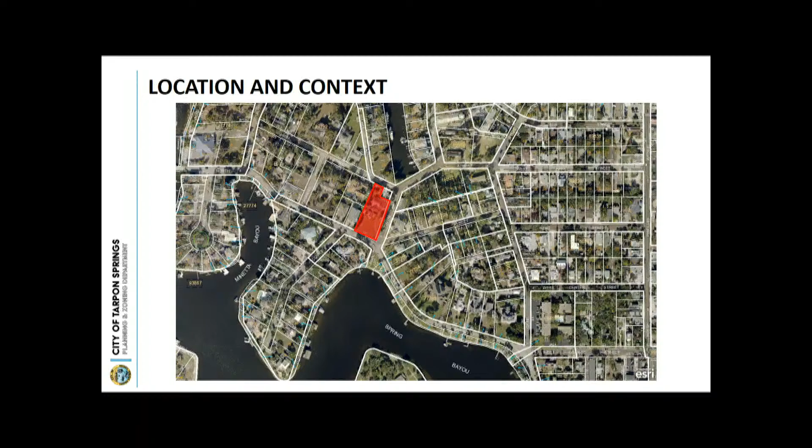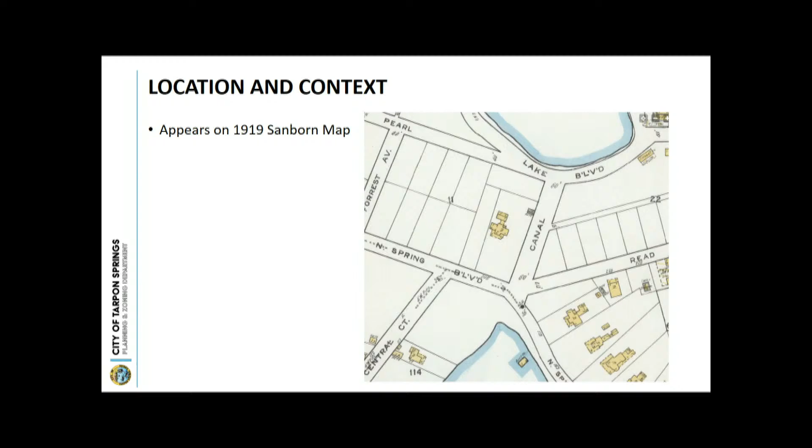This application is requesting approval to remove a portion of the existing driveway and install a new circular driveway, parking area, and walkway to North Spring Boulevard. An existing gate would be relocated to shield the parking area and air conditioning unit.

The subject property is a contributing structure in the neoclassical revival style. This is the picture from the Florida Master Site file. It shows the neoclassical elements, including the oversized two-story columns, the full height entry porch, and the symmetrical front entrance and fenestration.

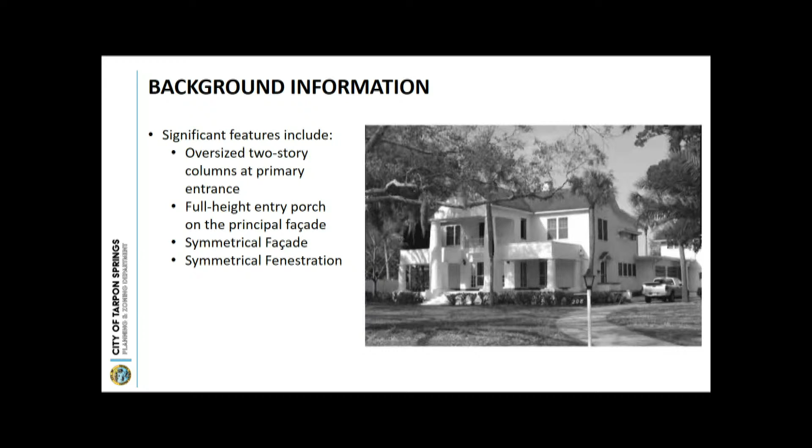So here's some background information about the property. The existing circular driveway doesn't meet our current code. However, it was constructed prior to the adoption of our current code, so it is considered legally non-conforming.

This is because the width of the two driveways—the circular driveway has a 9-foot driveway close to the intersection of Canal and Spring, and another driveway entrance near the existing garage structure. The existing width is approximately 35 feet at the garage and 9 feet closer to Spring Boulevard. So we would not permit this to be built today. However, as shown at the bottom left, this is a 1980 aerial, and it was constructed then, so it's legally non-conforming.

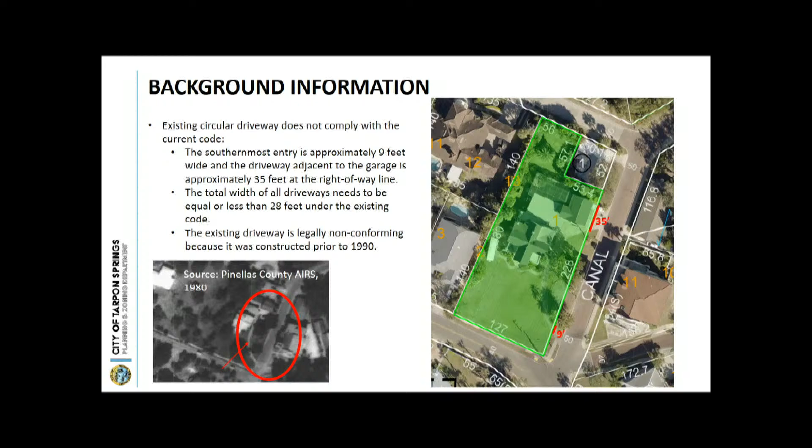This shows a conceptual site plan for it. That green area at the bottom right is the existing driveway entrance that would be removed. Just north of that, in the yellow with dots, is the existing driveway that would be removed and replaced with brick pavers. The remainder is all new, constructed with those brick pavers.

The applicant proposes 12 feet for the width of the driveway portion and 7 feet for the walkway portion leading to Spring Boulevard.

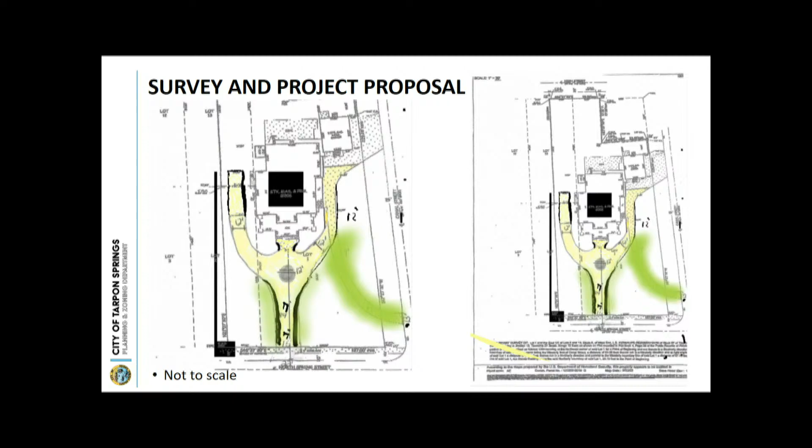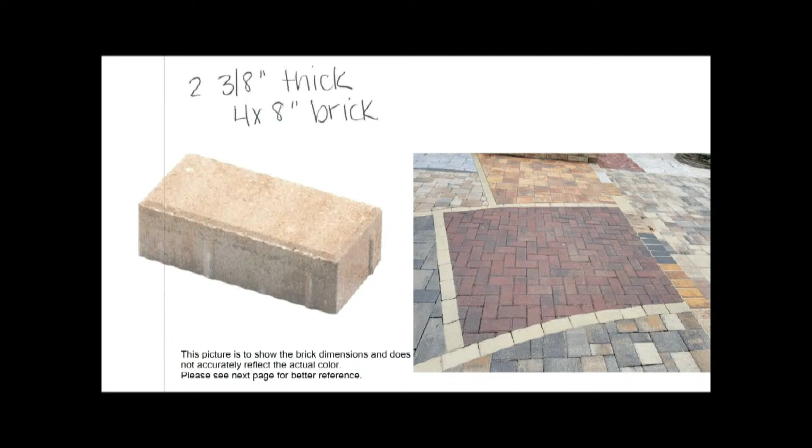However, that is why the applicant has proposed putting that new driveway on the west side of the house and moving the fence so that it would not be used primarily for parking.

The landscaping historically seems to have been of a kind of great lawn style with a lot of open grass, palm trees, and oak trees. However, that has changed a little bit over time—some trees have been removed, some new trees put in. And while the pavers would be a change to the historic landscaping, it wouldn't be inconsistent with the character of the neighborhood, as I've shown.

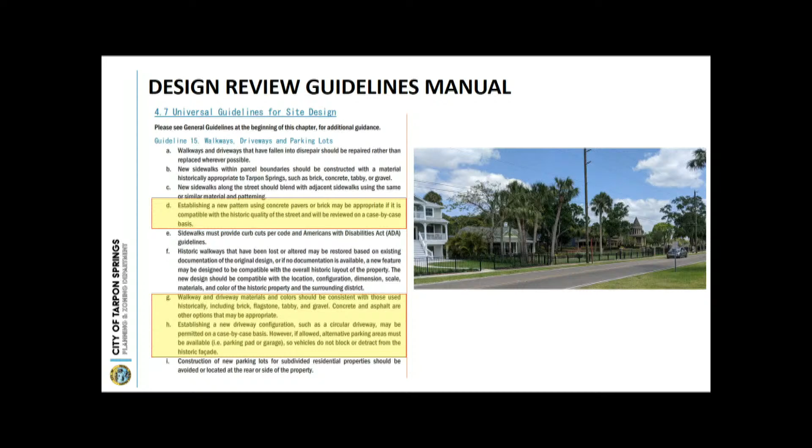And again, from the Design Review Guidelines Manual, considerations about altering historic layouts, textures, and materials—it's considered a good alternative to establish a new circulation pattern that's compatible and complementary to the historic design. I think the symmetry of the circular driveway and the two arms coming out would be compatible with the symmetry of the historic style of the home.

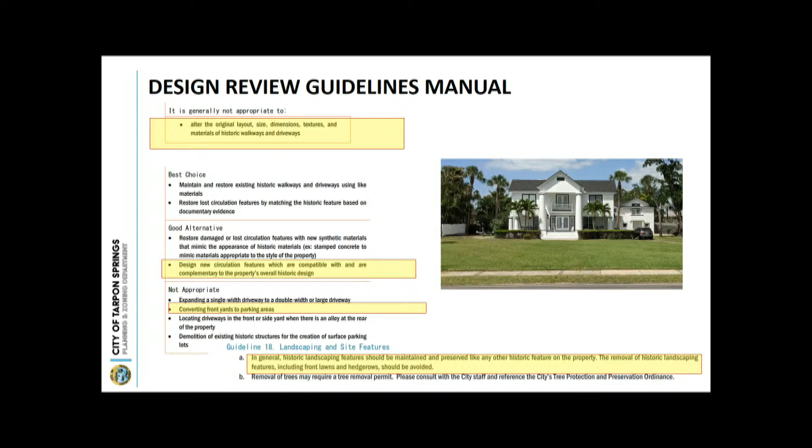So finally, I would say that the proposed project meets the Secretary's standards because the additions and exterior alterations don't destroy any historic materials. The new work is clearly different than the old work, and these additions could be removed without affecting the essential form and integrity of the historic property.

Furthermore, the project would be constructed in compliance with the Land Development Code, the Florida Building Code, and it balances the goals, objectives, and policies of the comprehensive plan.

Additionally, because the existing driveway is illegally non-conforming, this would bring this property closer into compliance with the code. So based on that, staff is recommending approval of application 2231 as presented for a certificate of approval with the condition that the circular driveway is not used as a parking area and would not obstruct the historic facade of the property, and that the certificate of approval would expire in 3 years if a building permit has not been issued.

And with that, I'm open to any questions. No? Okay, I just have a quick one. When on one of the other slides, you mentioned the landscaping. Is there any other landscaping that's required with a project like this? No. Okay, thanks. Okay, thank you.

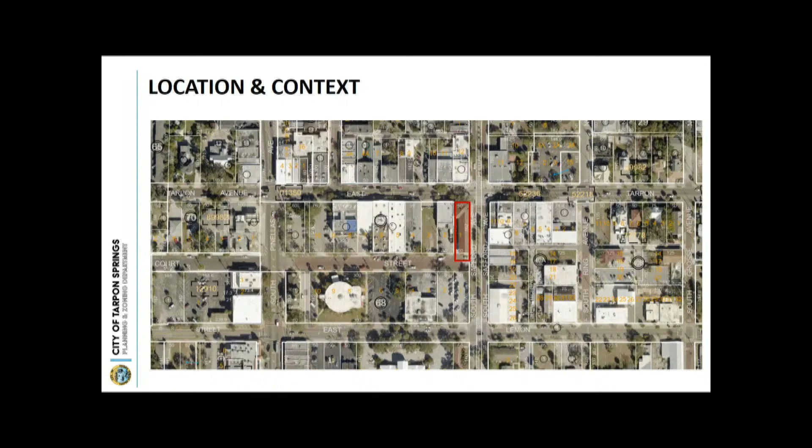Here is the location of the subject property on East Tarpon and Safford Avenue, located within the National Register District as well as the local historic district.

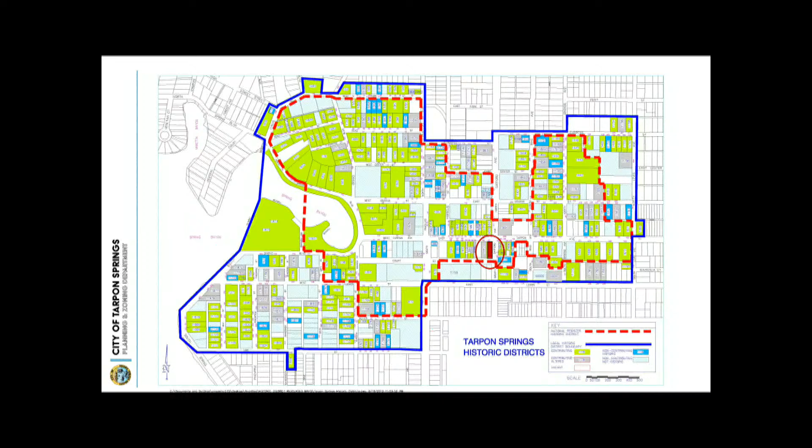The request is for a certificate of approval for the accessory structure, essentially a glass display garage for the jitney vehicle in the public right-of-way south of the historic depot. The architectural style of the depot is masonry vernacular. It is on the National Register of Historic Places in its own right, in addition to being a contributing structure to the districts.

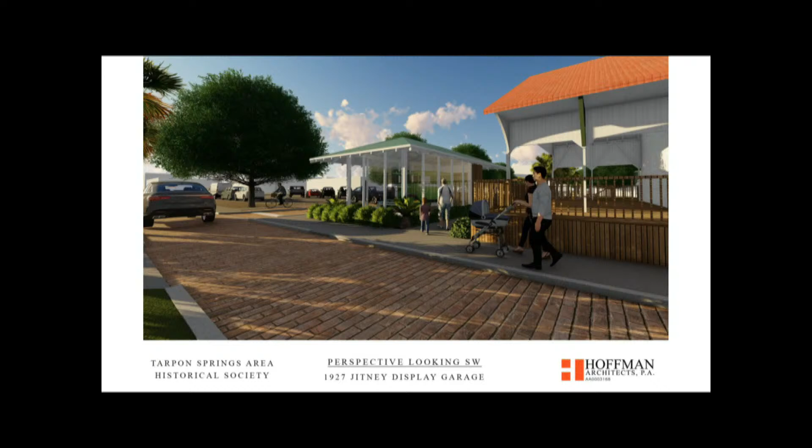So we have our standards for review. This structure is consistent with the surrounding area. It's got some elements of old Florida style, the standing seam metal roof, for instance. But it's simple, consistent with other accessory structures in the area. It fits into the neighborhood context, but it's not pretending to be a historic building. It is still clearly quite new.

The size and massing, the depot is rather large, and this structure would be much smaller, so it would be subordinate to the primary structure. I think that adheres with the Secretary's guidelines. It would be constructed in conformance with the Land Development Code, the Florida Building Code, and balances the objectives, goals, and policies of the comprehensive plan.

There are some guidelines for review that are relevant. The design guidelines review manual states that a new garage should try, not necessarily to replicate, but be consistent with the style of the primary building, which I think it does.

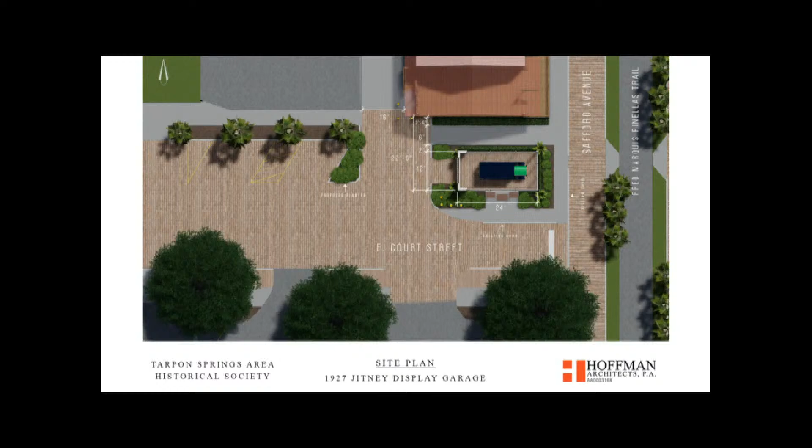Material-wise, we want to use brick and keep that consistent with the brick street the way it is now.

As you can see, the building is a fairly open building. That's the whole point of it, to be able to display the jitney 24/7, so anybody out there on the sidewalk can come by and see it. Currently it's housed in the city warehouse over here, and no one ever gets to see it. That'll be a big change.

We're going to air condition it and dehumidify it, so we can keep the car in good shape and keep the mildew off of it. We'll also have access on the backside of the building, where there are two old doors that hinge, so we can roll the car out and put it in parades or wash it or whatever we need to do with it.

We'll be lighting it. A number of people were involved in the fundraising of this several years ago, it's been a huge community effort. We have a bronze plaque, and we want to set that along with the history of the jitney there, so it's very informative to somebody walking up to it.

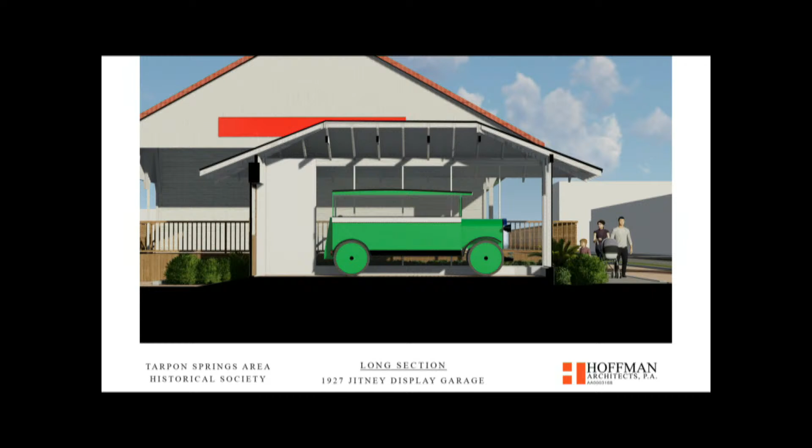There's one thing I don't think made it into this, the sign, the Tarpon Springs sign that's here. Keep going. Okay yes, thank you, it made it into the program, it made it to the show.

The staff pointed out, and that was a good call, that the sign is located down lower. So part of this is that we'll probably want to raise the sign on the building, the Tarpon Springs sign, so that if you're coming down the trail you're able to visually see it, it's not hidden behind the roof when you're looking at a distance.

That is pretty much the explanation of the building. I can certainly answer questions.

Color-wise, we have a little color panel. But, did I drop something? I thought I did, but maybe not.

The colors are very similar to what you're seeing there, well, not so much in this one, but the other one with the light green roof. Then the white trim, and the base color of the building, a kind of gray, a warm gray. Even though we have the white trim around, we might have the storefront that the glass is inset into done in a dark bronze, so the glass seems more expansive. The color is probably very similar to what you all approved for the Vincent Funeral Home, that kind of character. So it's a little bit of a Florida kind of building, with light colors.

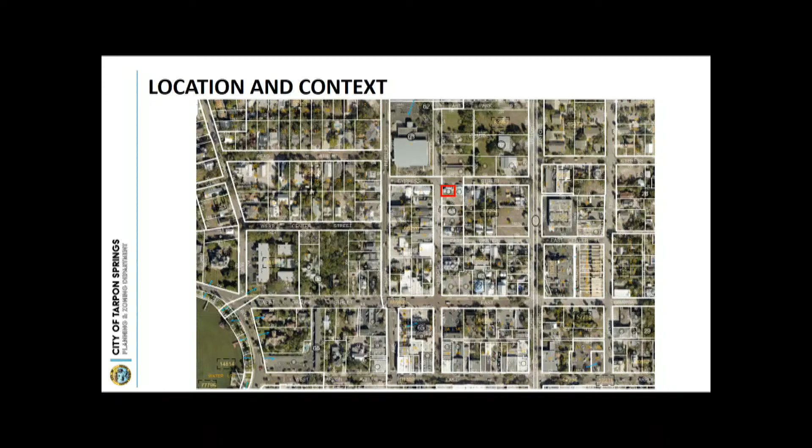So this is application 2249. The applicant is Patricia Hill, and it's for 230 Hibiscus Street. Here's the location of the subject property at the southeast corner of Hibiscus and Cypress Streets, just outside of the National District and just inside of the local historic district.

The applicant is seeking a certificate of approval for the installation of a 10 by 12 wooden shed at the rear of the property. It includes a high wind resistant shingled roof and hurricane straps. While it's considered a temporary structure, it's going to be rather sturdy.

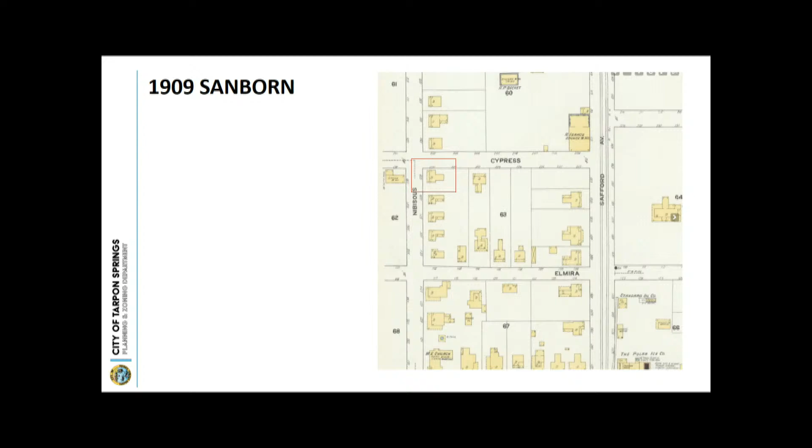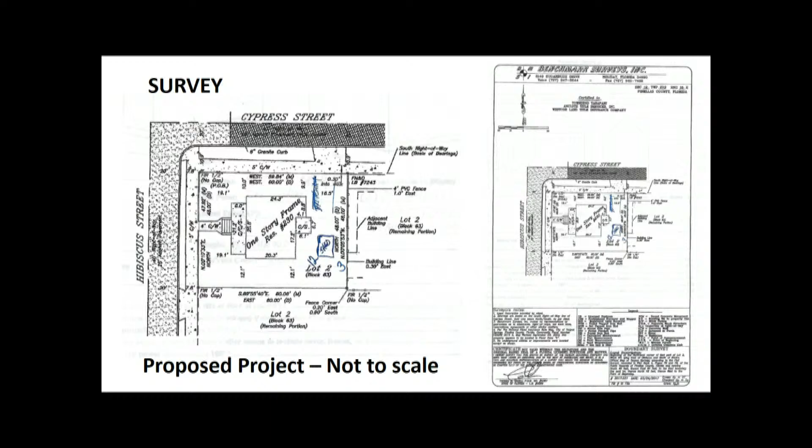And this long, boring slide tells you about the relevant code, and accessory uses are permitted in all zoning districts. This is considered a storage structure and a temporary structure, even though, as I said, it would be constructed to standards. In all residential districts, they cannot exceed 200 square feet, which this shed does not.

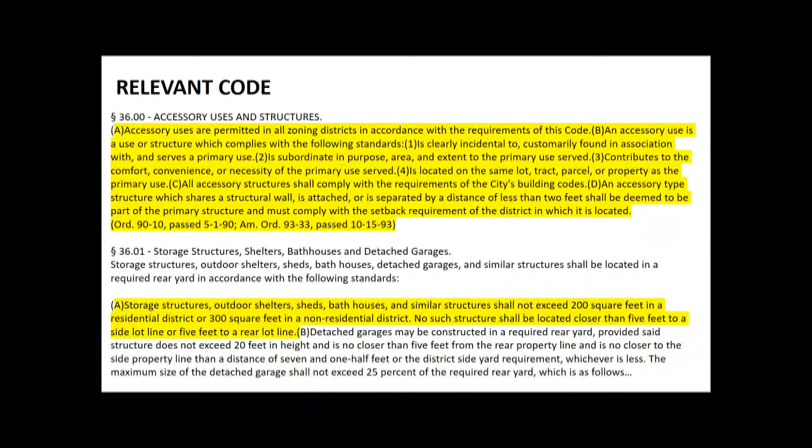So your standard of review, again, new construction consistency - is it consistent with the primary structure, considering that it would be a wood structure? And it's similar to other accessory structures found in the district. I feel that it would be. It's consistent with the neighborhood character and context.

The new construction home right next door to it is a similar style. It's built, and all of the houses around it are smaller wood homes. On the other side of Cypress Street, there is a multifamily property, but due to its location, it doesn't really have extreme height or anything, and again, it's not located in the district.

The shed is 10 by 12, and I believe the height is 10 feet 2 inches, so it would be clearly subordinate to the primary structure.

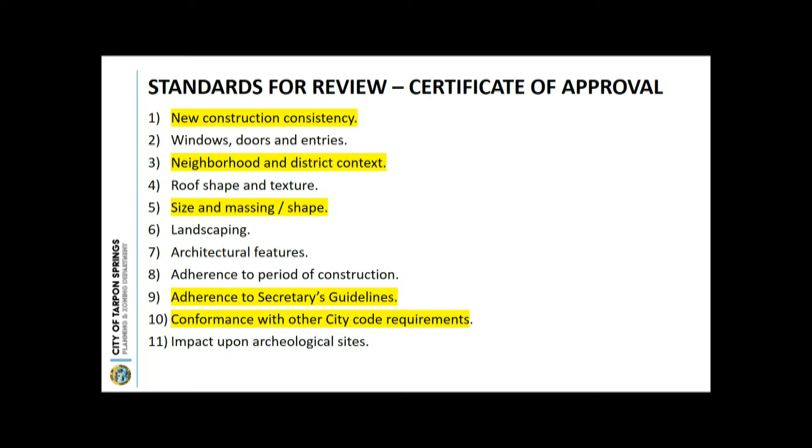And then I believe it adheres to the Secretary's guidelines, particularly it's not going to destroy anything, and if it were removed, it wouldn't damage any of the integrity of the primary historic structure. And as I said, it would be constructed in conformance with City Code, Florida Building Code, and overall balances the goals, objectives, policies of the comprehensive plan.

So here's just some of the relevant guidelines from the Design Guidelines Review Manual. It's stating that accessory structures need to be located at the rear or side of the property. In this particular case, since it's considered a prefabricated, non-permanent shed, it needs to be located at the rear, which it would be. It's small in scale, and it's congruous with the style of the primary structure.

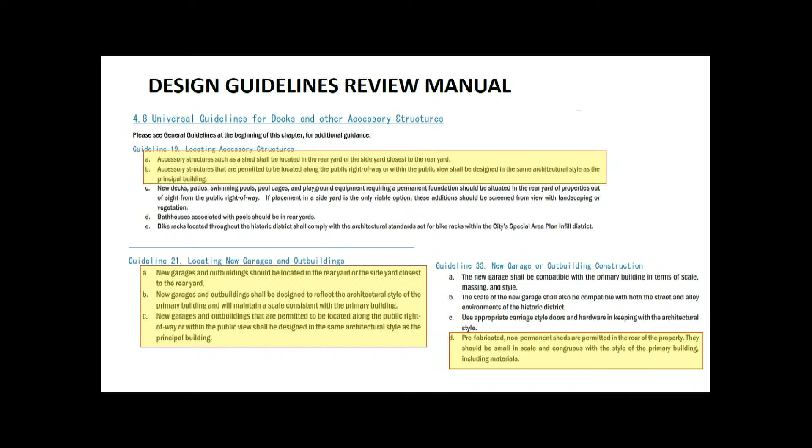Based on those findings, and as I expounded in the staff report, staff would recommend approval of application 2249 with the following conditions.

The building permit will need to be revised to show the appropriate setbacks, and all required side setbacks need to be met. The certificate of approval would expire within 3 years if a building permit is not issued.

This was publicly noticed, and the neighbor next door at 112 Cypress Street did give me a call. I discussed it with him when I was out there doing a site visit, showed him how it was going to work and how it was going to be set back from his property line. He didn't send any formal comments on it, but I think he was clear on it and okay with it. Thank you very much.

Does the applicant want to say anything?

Hi, I'm Patricia Hill, and I have stage fright, so with your permission, my partner will read a letter that I had prepared for you. This is Tim Garson, he's my partner.